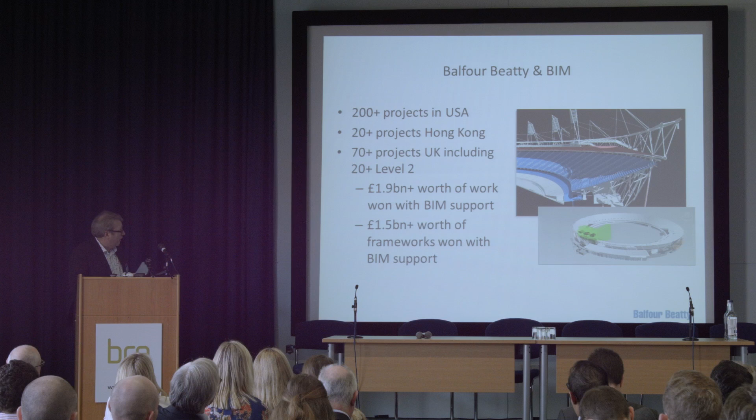So the context side of things, BIM is our default way of working in the States. We've got over 200 live BIM projects. And however integrated the supply chain are, very few would be equivalent to BIM Level 2. Very few customers require the data. But BIM is a given in terms of the expectations of most customers. We do BIM in Hong Kong. We've got over 70 live projects in the UK, and more than 20 of those are what we'd all know as BIM Level 2. Without the ability to demonstrate our credentials, we would not be able to secure work, which you all know.

We also did a survey of all our UK BIM projects a while ago and asked the project team to report, tell us how it is for you. Have you seen any benefit? Out of those responded, every project reported that BIM helps to reduce risk. These are some of the benefits that the DIO were very keen for us to share. Majority reported that it improved project efficiency, improved services coordination, and where the client was engaged, i.e. participated in maybe design reviews, clash detection workshops, and so forth, it enhanced the engagement process and significantly reduced approval periods.

Where projects could capture metrics in terms of cost saving and time saving, a third reported it saved cost from £8,000 on temporary works integration on a small school to a £10 million capex saving on one large project. Almost a third said it could help with programme savings and could quantify it by 2 weeks or 3.5 months on one large infrastructure project. So as you can see, these benefits are substantial, and our task internally within Balfour Beatty is to try and see that these benefits are consistently achieved across all our projects.

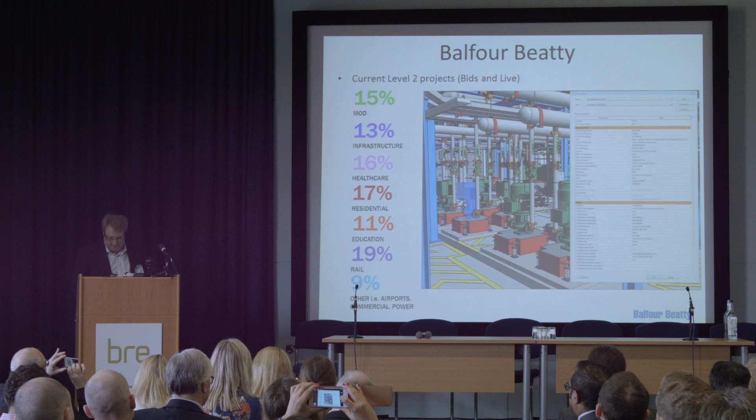Easier said than done. Current BIM Level 2 projects, you can see a range of percentages. These are based on our pipeline. So this is our bid work as well as live Level 2 projects. So a mixture of health, education, infrastructure, and Ministry of Defence, all requiring BIM Level 2. We are fortunate recently to have received our certification for our processes by the BSI, that they're in accordance with BIM Level 2 requirements.

So on to Brize Norton. For those of you who are Mission Impossible fans and follow Tom Cruise, what has this got to do with BIM? Well, in his latest Mission Impossible film, Rogue Nation, you probably saw him strapped to the side of a plane. Well, those planes require maintenance, and they will be maintained in the hangar that we're constructing, that will be handed over this summer. Our ultimate client is the DIO, but Airbus will be the tenant who will undertake the work within the hangar. So the hangar will cover 3 aircraft. You see the value, and it's BIM Level 2.

Interestingly enough, on all our current BIM Level 2 projects, none are identical. But there is a common factor amongst all of them: each of our customers have asked us to work with them to develop the data and asset list and requirements. Nobody has a pre-structured list to say this is all the assets that we need and this is the technical data that we require. Each one of them have required or been part of a collaborative process. And this particular project, Brize Norton, is no exception, and together with DIO and with the team, we've developed the list of assets. I'm grateful for the team, not only for their contribution in the project, which is going very well, but also their contribution to today's presentation.

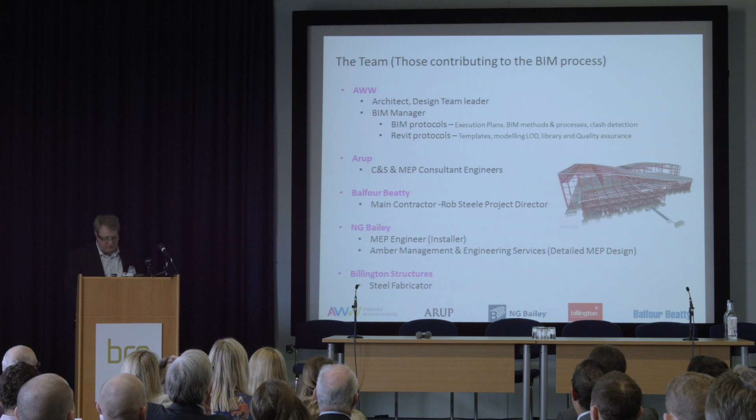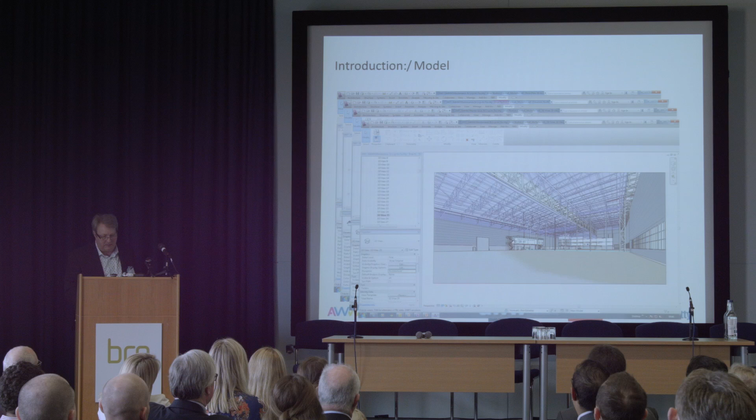and you've all seen BIM models before. We're using Revit on this particular project, and Navisworks. We're also using Solibri, and we acknowledge their contribution in this presentation. We'll talk a little bit about that. So we're working with the DIO, we developed key objectives, how they would use the data.

The facilities management work streams, so optimize the handover, going into the asset register, linking with the operating and maintenance manuals and so forth. And of course, you might say it's a hangar, a big shed, very simple. But nevertheless, there's some areas of complex services, large steel frame, several workshops, and I wouldn't be giving due respect to this team if I didn't congratulate them that according to our project manager, there wasn't a single clash between our MEP and structure and architectural work.

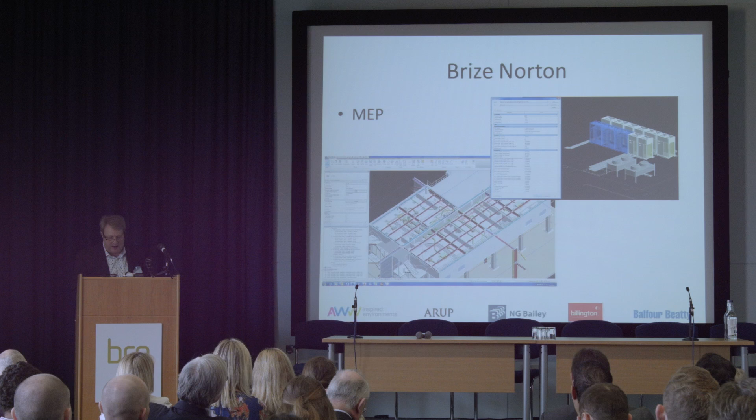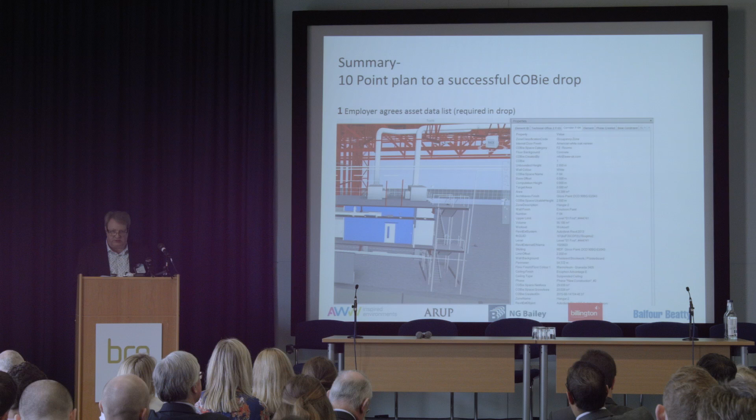So there is complexity, and these just demonstrate some of the office areas and workshop areas and link to the data. So what I'm going to talk about next for the remainder of the presentation is, and I'll try and be as simplistic as possible, a 10-point plan to a successful COBie drop. Now, what kind of COBie drop? This is the drop that will take place at practical completion. So in the time remaining, we've got just a few minutes.

So number 1, the employer agrees the asset list. What information do they want, what format, and when? Number 2, what are the rules of the game that you're going to employ in this process? In this particular project, we use Uniclass 1.4 because of the time these decisions were made. There are updated versions available, of course. We also utilized standard COBie as a delivery framework, and we chose Solibri as our QA model checker. Plus, we used a plugin of a COBie extension for Solibri.

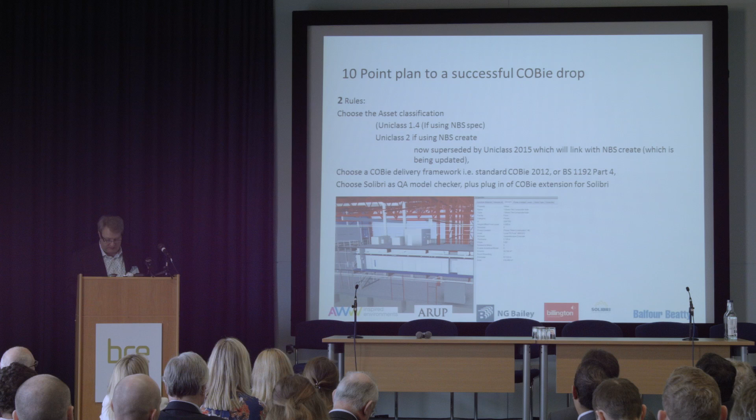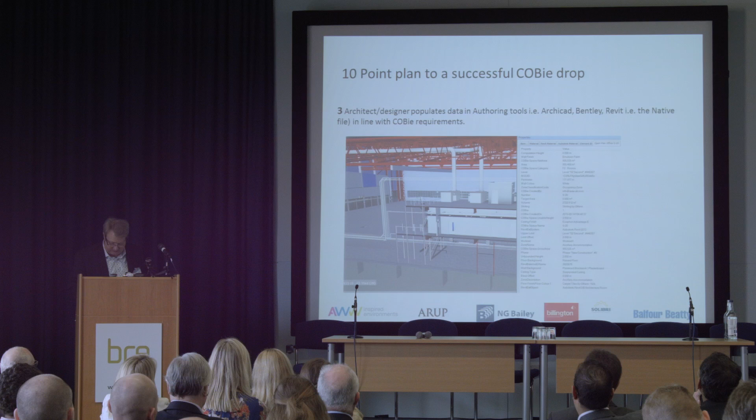Number 3, the architect or the designer populates the data in their respective authoring tool, which in this particular instance was Revit, in line with COBie requirements. You could have a whole workshop on this discussion. What is important, though, is the data consistency. Revit, for instance, has a plugin. I do know, and this is not a pitch for Revit, there are other authoring software tools that are available to use that are equally good. But this particular project, the designers were all using Revit. Okay?

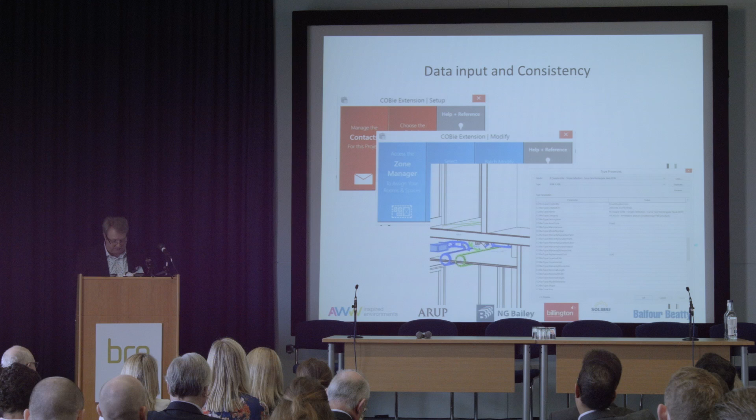And Revit users need some help perhaps to understand the COBie processes, and that's where Solibri and their expertise were very helpful. We appreciate that. It does help if the authors can apply a Uniclass classification code to all the types, including perhaps those types not required in the drop, as it will help the structuring and sorting of data later on.

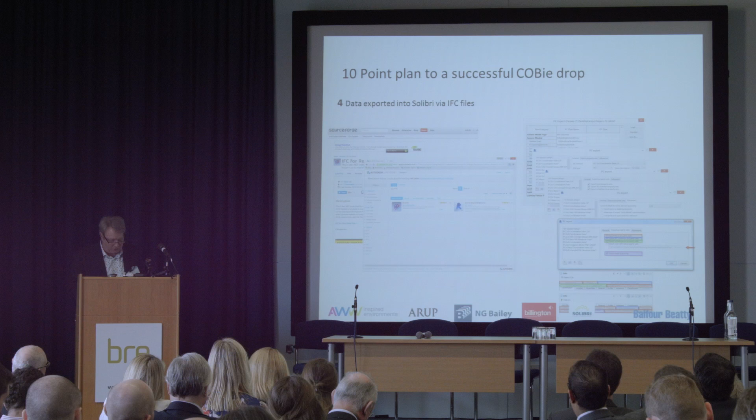Number 4, the data is exported into Solibri via IFC files. Now you can download various IFC translators, but basically the illustration shows some of the data options color-coded in Solibri. They help users to understand what information is accessible and related to which options are checked. We need to ensure the latest IFC plugin is installed by the authoring tools into Solibri. Sorry, it's getting a little bit techie.

Number 5, halfway there. The IFC files are then checked or validated against a set of modelling rules through Solibri software. So the rules are first of all written in line with COBie requirements. The geometry checks are undertaken, perhaps showing missing spaces or areas that haven't yet been modelled. And then there's the data checks to check objects to ensure the correct data is associated with the elements. The Solibri software checks the model at each of the relevant stages.

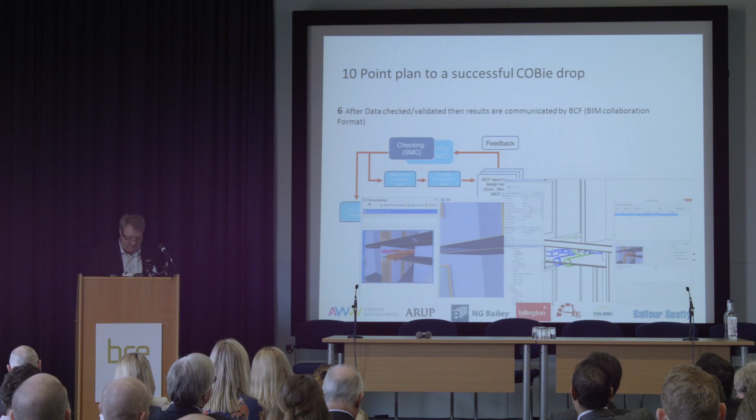Number 6. After the data is checked and validated, then we communicate the results by BCF, which is a BIM collaboration format. It's an issue-based communication protocol, a scheme if you like. It's owned by buildingSMART. And then you identify any corrections, additions that need to be made, and you repeat the loop and recheck.

And then you need to capture on-site information. So you've captured information from the authoring tools, from the designer's input or supply chain input. And on this particular project, key elements of the hangar were steel frame, M&E, architectural, lifts, and all of those supply chain partners shared their models with us. So, but we've got to capture some information. So now, one way is to manually populate the information in the COBie spreadsheet, but that might be difficult for some supply chain members to understand where their data goes.

And for those of you who've opened up a COBie spreadsheet that could have thousands of columns and worksheets, the last thing you really want to do is to start manually populating it, in my view. So there are work package solutions, and we worked with AEC BIM Solutions using a capture tool called Work Package Manager, which is separate from COBie, but it helps the supply chain to identify, make it easier for them to capture their relevant data to import into the whole.

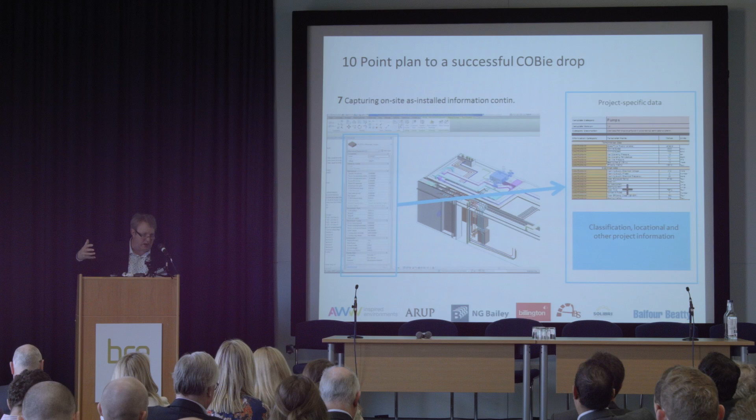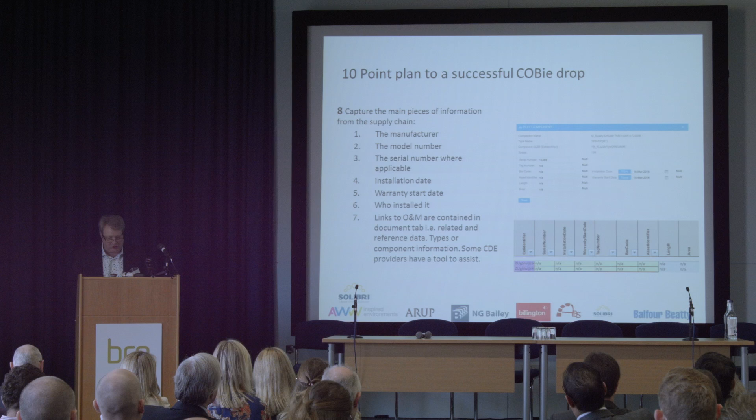So, continuation of this point, so you capture the information. What is the project-specific information? You've got the product type, which might be generic, who installed it, when it was installed, etc. Number 8, nearly there. So you capture those main pieces of information. I said earlier on that you could argue there are only 7. There could be more than that, but whatever they are, it's where you capture the manufacturer, model information, serial numbers, etc., and linked to operating and maintenance information too.

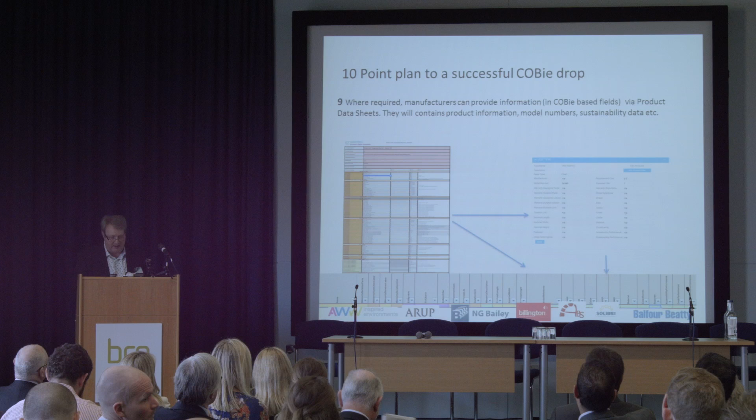So number 9, where required, manufacturers can provide information in COBie-based fields via product data sheets. Some of you might be part of the working groups of various institutes, CIBSE or Landscape or whoever, who are developing the product data templates for the respective products. These contain specific information. For instance, an example of the Landscape Institute, they hold all the PDTs for their industry. Based on standards, trying to get consistency across the board, which will then automatically or semi-automatically populate COBie information.

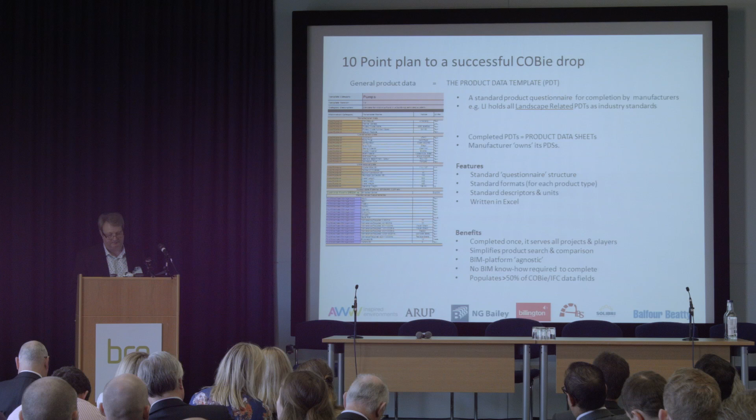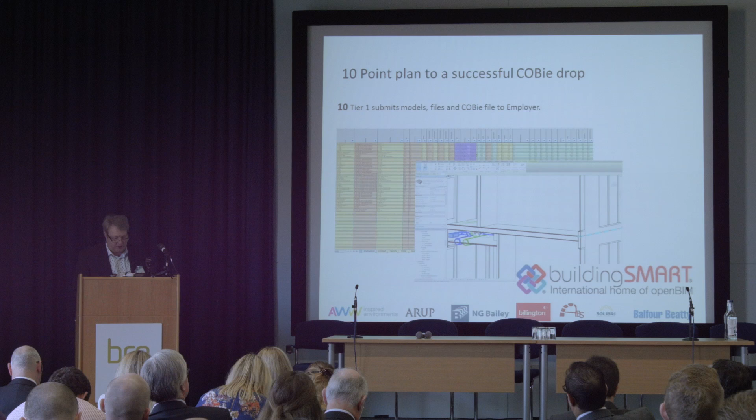And last but not least, you've gathered all the information, so you submit your models, your files, and the COBie file to the employer. And we'll be doing that in summer of this year. We've done some tests, and our systems are going well. So we're very confident of a successful handover, not only of the project, but also the associated data that goes with it. So in conclusion, what benefits have we realised to date on the project?

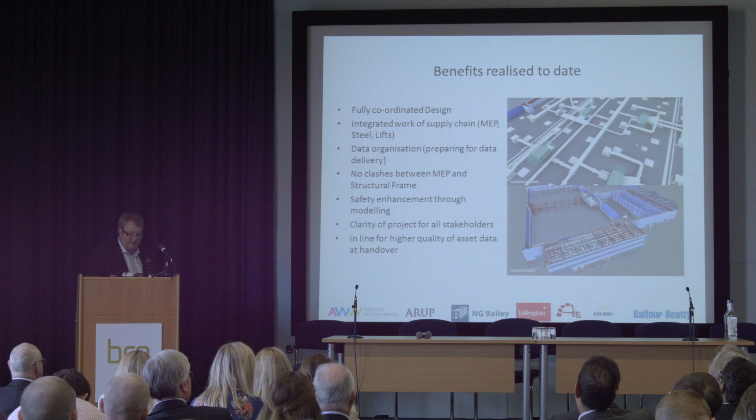Well, we've been fortunate to have a fully coordinated design, integrating the work of MEP, lifts, steel fabricator. We've got the team that understands the data organisation, the flows, the processes. We've talked about a clash-free environment. We've talked about enhanced safety through modelling, helping mitigate risks. So there's absolute clarity for all project stakeholders, and the client will get the higher quality of asset data compared to a traditional project with drawings and documents.

Was everything perfect? No. Are there areas for improvement? Absolutely. And just a couple here. Part of a hangar, large hangar, we would have really liked a nationally known, I won't name them, cladding supplier and installer to be BIM equipped on this project. They were not. And the project team were frustrated, and I'm talking about my Balfour Beatty colleagues now, not the designers used to BIM, but my project colleagues were frustrated because some of the issues that came across, they understood how easily they could have been resolved if the cladding envelope supply chain member were producing models and able to input into the whole, able to resolve these issues virtually before you get to site.

We also didn't equip our full team with perhaps all the hardware that we would on any normal site now, so they can access all the information, all the data, and use it quite widespread on the site, rather than having specific individuals having access to this information.

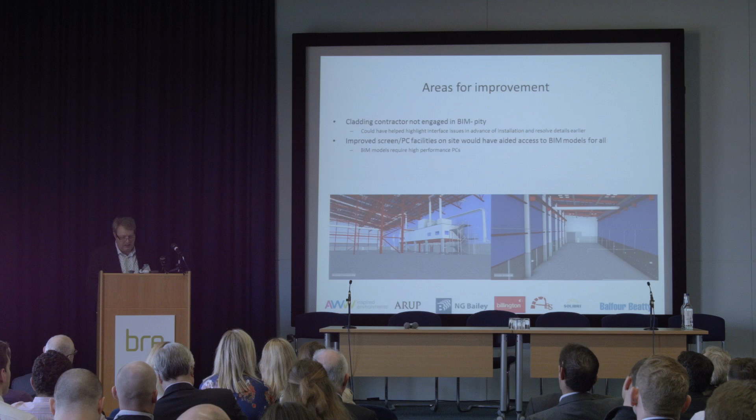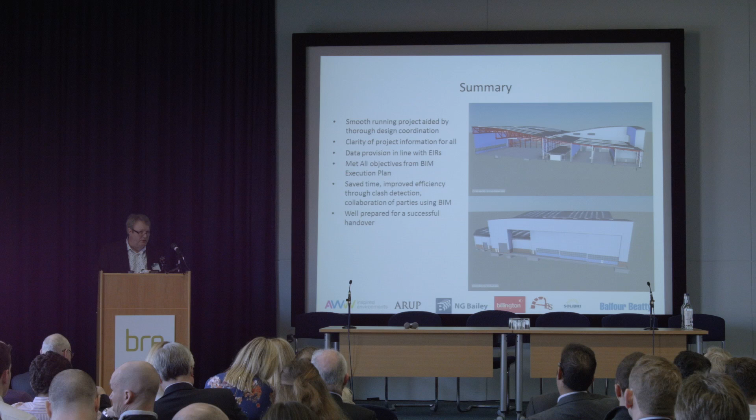So in summary, we're fortunate to have had a very smooth running project, clarity of the project information for everyone, including customers, those engaged in decision making. The data is all aligned to the EIRs, which is what you expect from a BIM execution plan and delivery. And thankfully, I hope we've met all our objectives that were stated in the client's EIRs. And we've saved time, improved efficiency through our clash detection work. So we're prepared for a successful handover.

One point to share with this group, and it's an area that you might debate and consider. Clients ask for drawings, they ask for models, and they ask for data at the end of a project. However, as you get into the forensic level of data, which will be integrated into their FM packages, fine, it's interesting to note that there's not yet a recommended minimum for models to be handed over. You could have models that are purely design models only, and you could still have the data handed over without a single member of the supply chain sharing their models or even working in BIM. Perhaps that's not important, perhaps it might be.